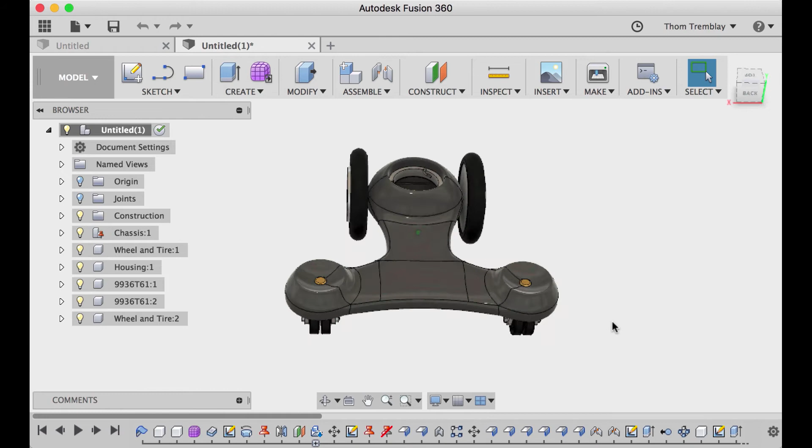The first step is to download the starter file and bring it into Fusion 360. You can upload it into your current project, or as I'm doing, use Create New Design from File and select the F3D file that I downloaded. Once it's in, I can see it's the entire model, and I can see the structure in the browser.

There are multiple components: the chassis, wheels and tires, the housing, and the back casters. Since this was modeled in Fusion 360, the timeline will contain all of the features.

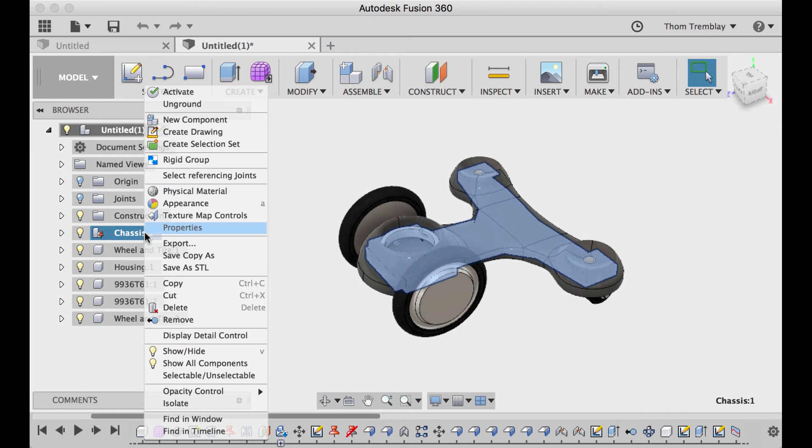I'll activate the chassis and see that there are multiple components inside of it. I'll isolate it to get a better view. You can see there are a couple of components, as well as a sheet metal body.

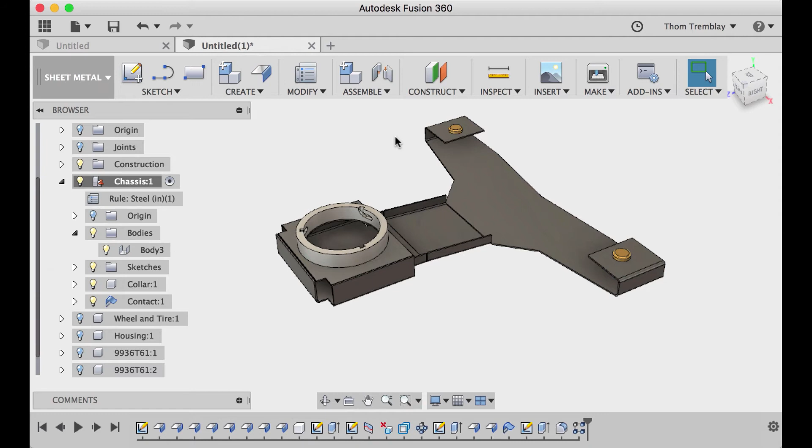Sheet metal features are new to Fusion 360, and there's a separate sheet metal workspace that you can use to add custom features to the existing model, or to see how this model would look as a flat pattern.

Adding flanges is easy. By selecting an edge and dragging out the size, you can create a new flange. You can also change the way the flange is defined.

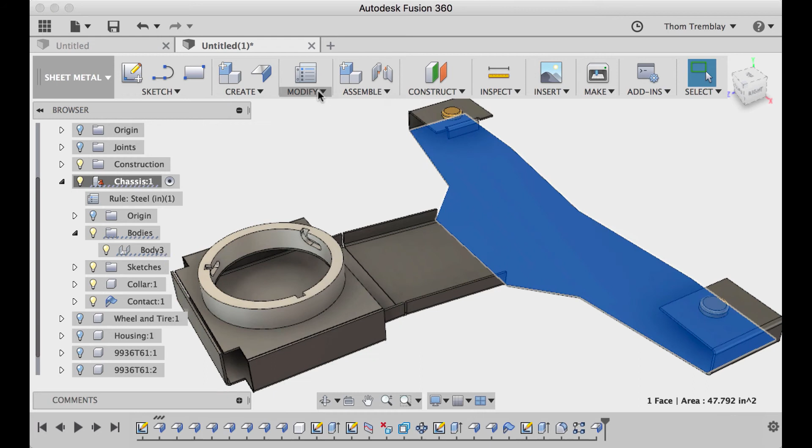Selecting a face, you can create a flat pattern and see how a sheet metal part would need to be developed before it was folded into shape.

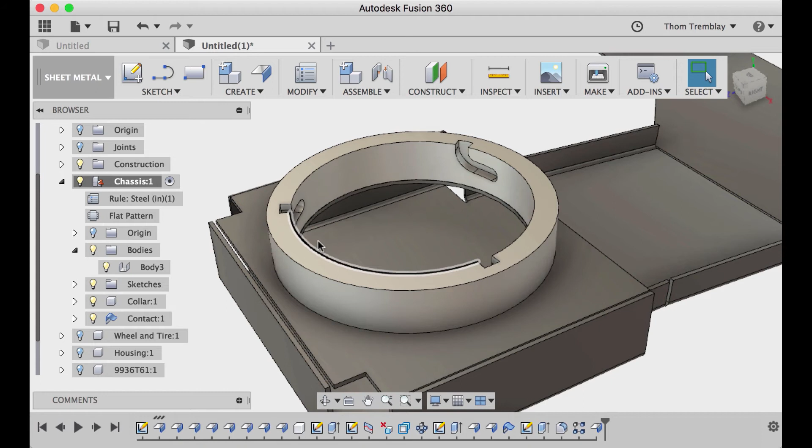The locking collar is provided for you to design your own attachments and connect them to the robot base. You can create something completely unique and connect it to the base with this simple mechanism.

Near the back of the robot are two brass connectors. These are merely representatives. Use your creativity to define ways of passing data, power, or any other information you want to your attachments.

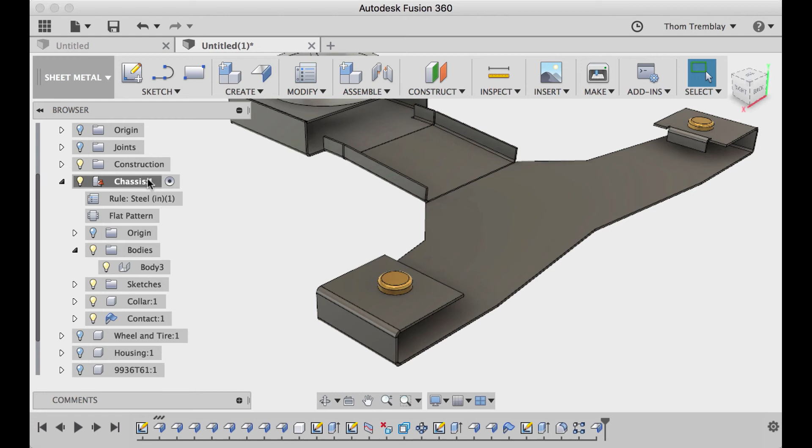I'll use the Unisolate tool to bring back the rest of the model, though the chassis is still active. Now I'd like to activate the housing. When I do, we see the features that were used to create it.

By double-clicking on the form, I'll return to the Sculpt workspace and see exactly how this body was created using T-spline bodies. I can select any of the edges or faces and use Edit Form to reshape the model.

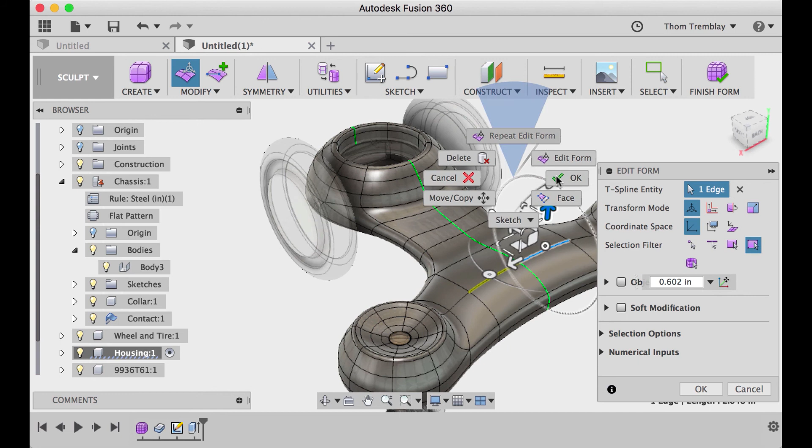Even though this model was already created, you can still make any changes that you like, such as deleting edges or creating entirely new faces. I'll return back out and take a closer look at the casters.

To shortcut the process, I'll copy the name of the caster that was placed into the model, then go to the McMaster-Carr Library under the Insert pull-down.

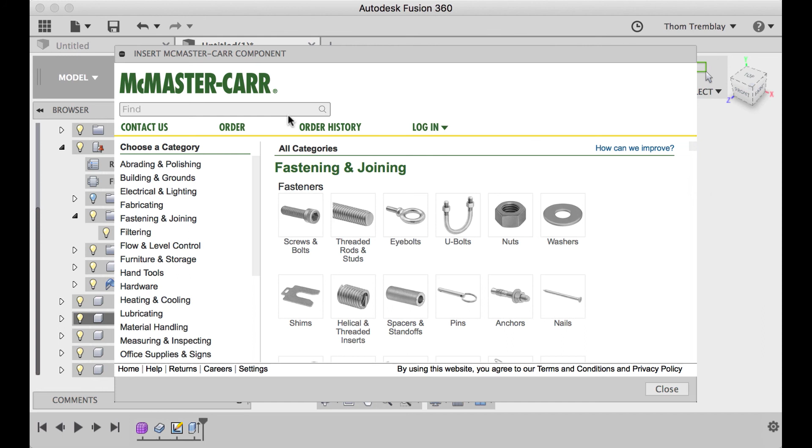In the McMaster-Carr Library, I can find my own casters, or use the paste function and search for the existing caster in the model.

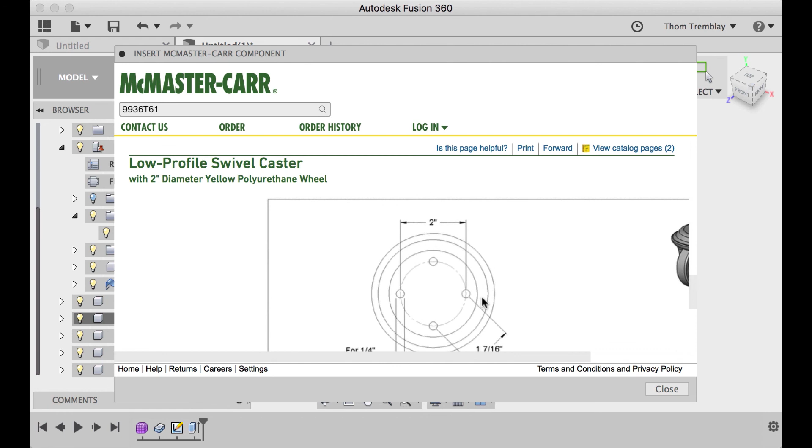The library will bring up the page where I can see the options associated with that part number. I can also go through the process of seeing the product detail, reviewing the information about the caster, and even seeing how the 3D step file would be saved into the design.

You can also explore making changes to the appearance of the model. Built into the model are red, gray, and white finishes, but you can always use your own appearance as well as adding decals.

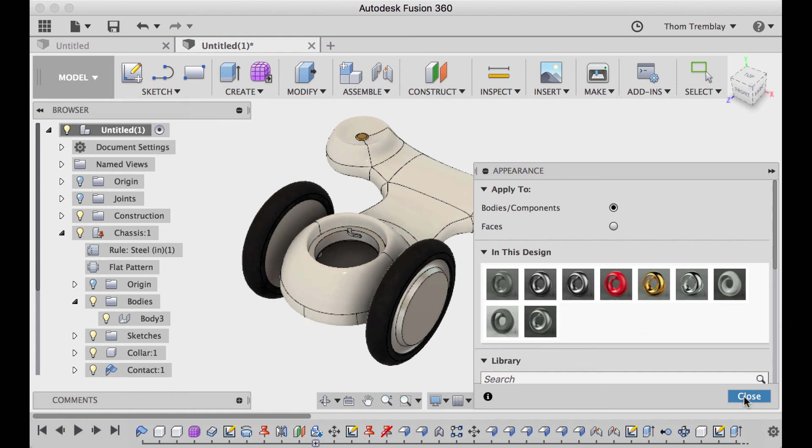Once you have your appearance set up, feel free to enter the rendering workspace to create the renders for your contest submission.

I hope you'll use the robot starter file as a springboard to your creativity so that you can show the world what's possible with a simple, flexible platform.